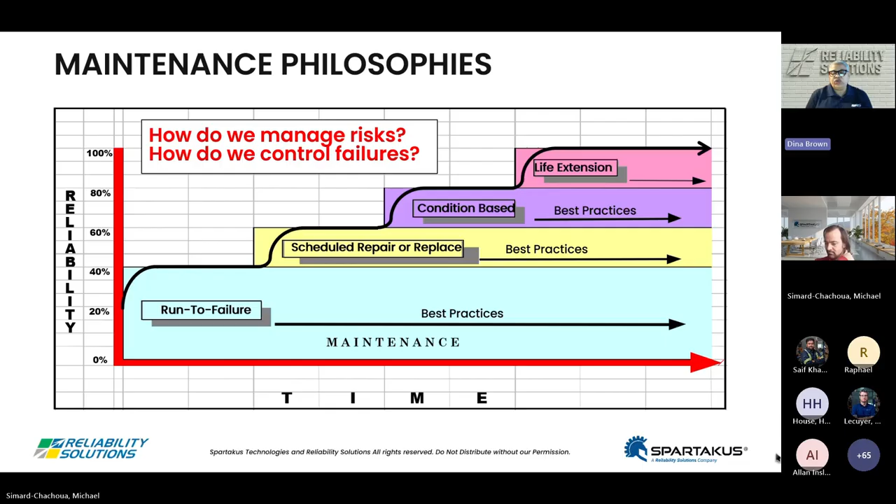So when we talk about maintenance practices, how do we manage our risk? Maintenance management is very much like risk management. How do we control those failures? We have to choose the proper maintenance practice on our equipment. Of course, you will see here: run to failure, schedule repair or replace, condition-based, life extension. We have to choose the right one for our equipment, because all of our equipment is different. It's based on criticality and other things about that equipment.

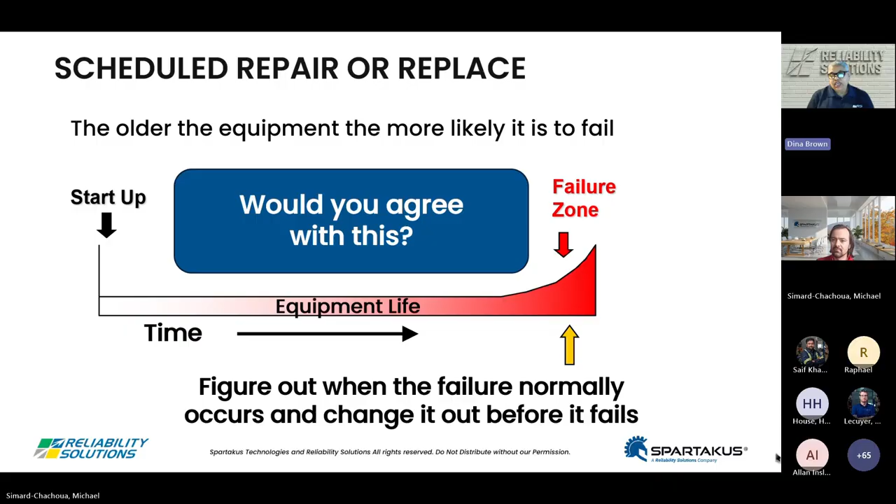So we'll look at the scheduled repair or replace for a moment. This is the B pattern from the Nowlan and Heap patterns, and everybody's pretty much familiar with that. It says the older the equipment is, the more likely it is to fail. How many people agree on that? If that's the case, couldn't we just figure out when the failure occurs and change it out before it fails? That would be ideal if this were true, wouldn't it?

But we have to keep in mind, when we look at this pattern, it only happens about 2% of the time in our equipment. Now, how equipment really fails - there's a total of 6 patterns that I'm sure most of you are very familiar with. I want you to look at that A, B, and C column there. They're all age-related type failures.

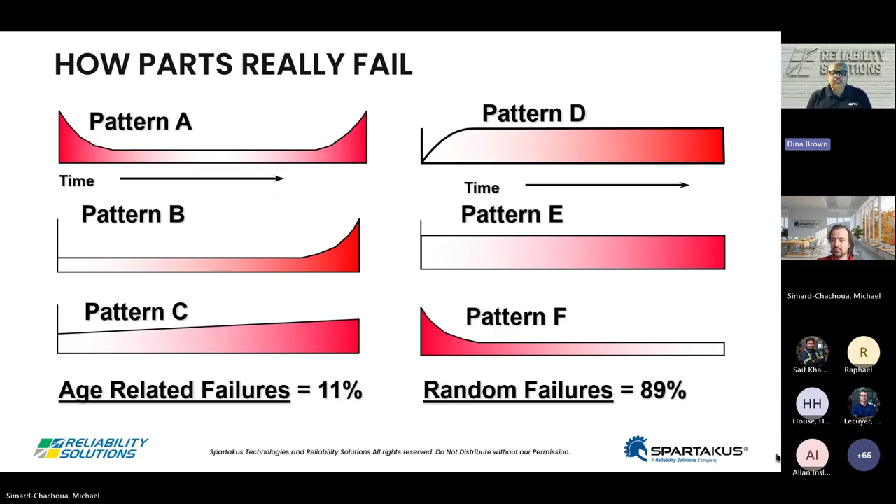And then when you look at D, E, and F next - wear-related, age-related failures on the first column, A, B, and C, and random failures over on D, E, and F. When we take a look at those random failures there, it says 89% versus failures that are based on wear and so forth, age-related, it's only 11%. So where's the bang for our buck? It's needling in on those random failures, and precision maintenance helps you do that.

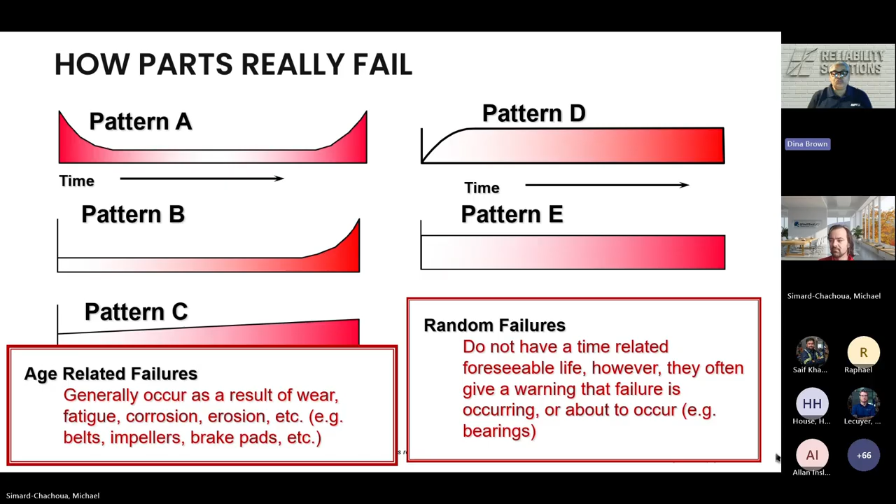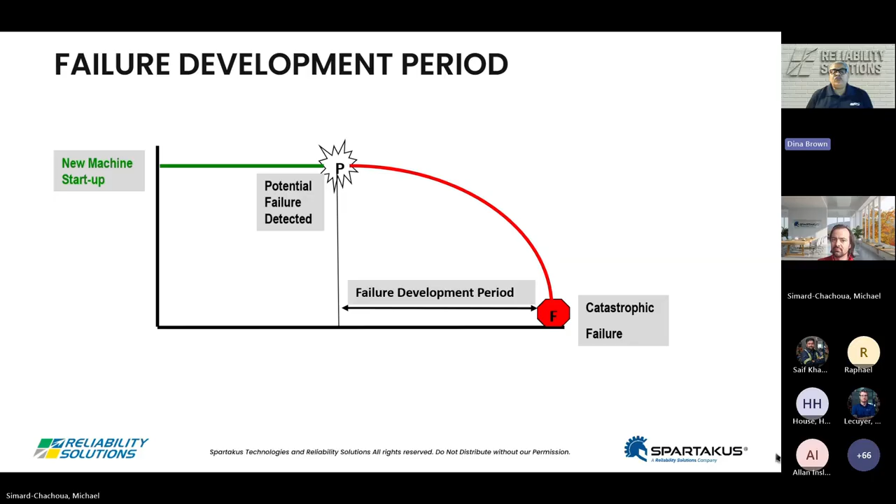And of course, coming from the Nowlan and Heap study, the failure development period, or P to F curve, was developed. That's just from when the potential failure is detected over to where we have a catastrophic failure. Keep in mind that before the catastrophic failure, we can have what? A machine that's functionally failed for us. It's not doing what it's supposed to do, although it's still running. So keep that in mind.

And within that FDP period, there's different tools we can use to detect things. Of course, you have your early detection, like your ultrasonics and vibration analysis, even oil analysis. But many times we can put simple tools in the hands of our technicians, mechanics, millwrights, or whatever, and they can find issues out there as well, especially if you don't have a vibration analysis program or whatever is going on in your facilities.

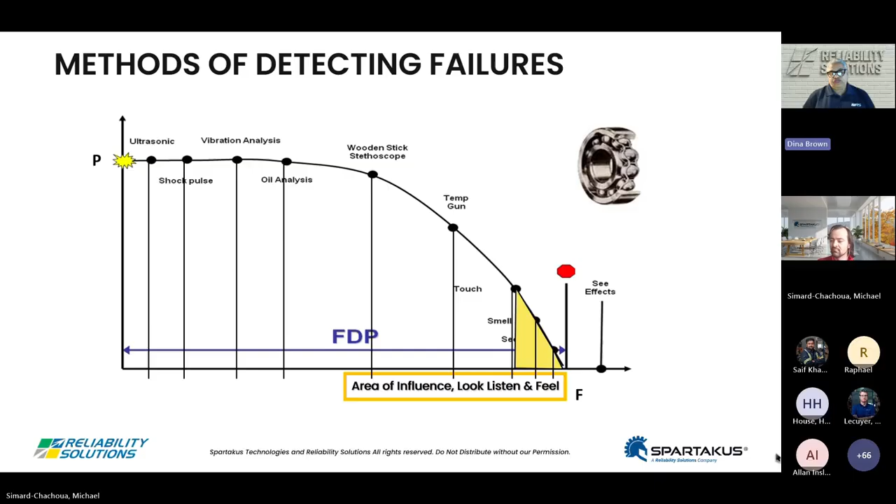This is the area of influence from us, from look, listening, and feel using the human senses. But by that time, it's pretty much gotten very, very close to catastrophic failure. So temp guns, strobe lights, stethoscopes, whether it's a screwdriver or a wooden stick - little things like that help as well.

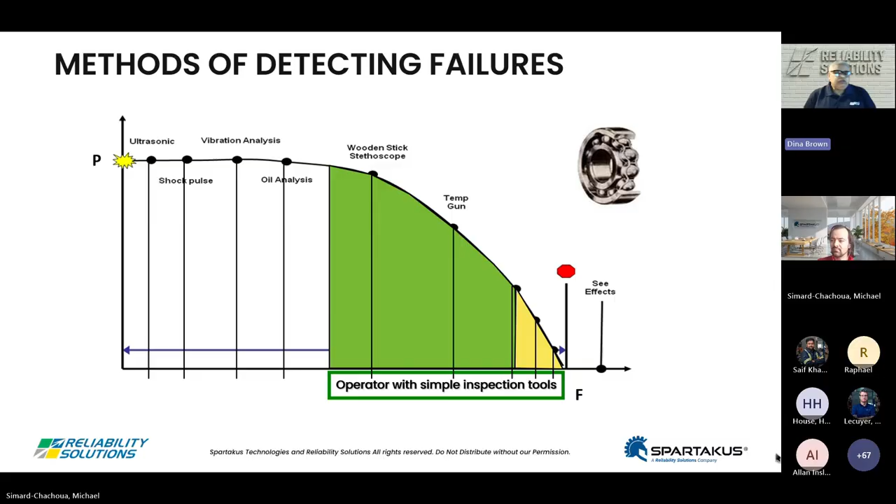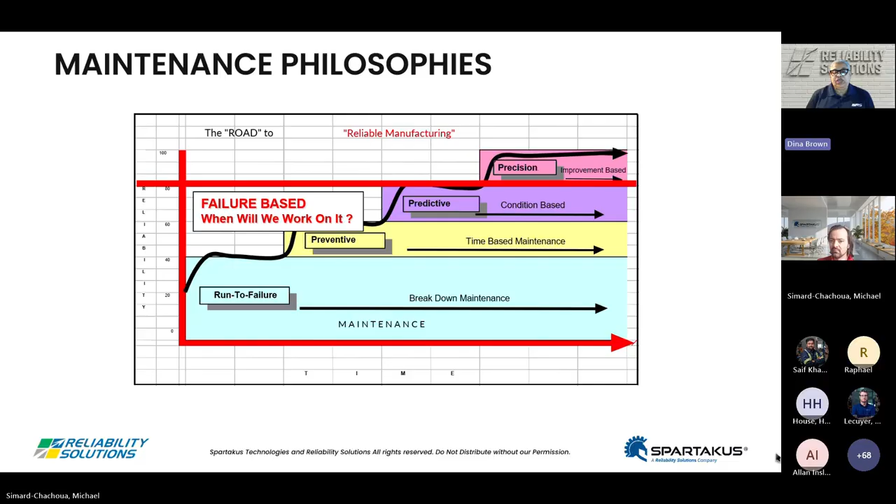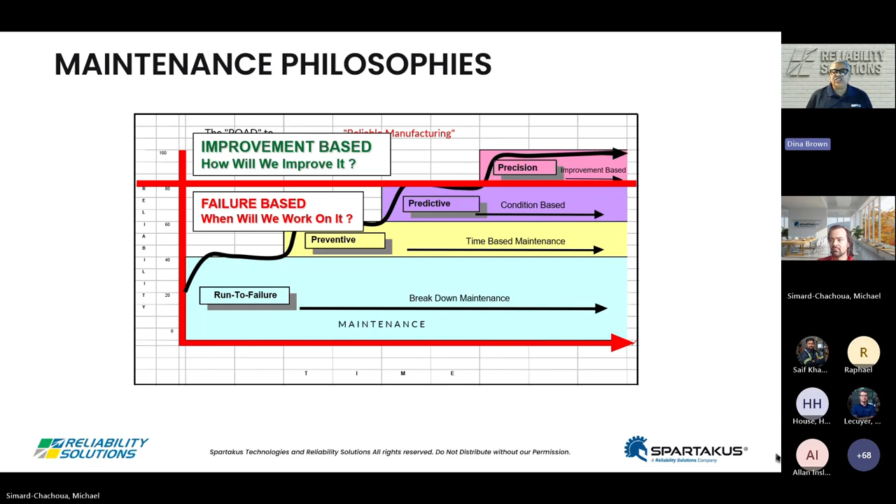Of course, maintenance philosophy, we just looked at this earlier. The big deal here is looking at run to failure, preventive, predictive, and precision, and why we should always be choosing precision. All of these practices have a place in our world, but if you look at the bottom 3, although they're very good with their intent and used where they should be, they're all failure-based versus the top one, precision, that is improvement-based. So no matter what practice we choose, we should always be doing precision, doing it right, even with run to failure, so it will last as long as it possibly can.

Next, and of course we talked a little bit about vibration. Why vibration? Vibration is the leading tool to tell us the health and condition of our equipment to start with. And we know if it vibrates less, it's usually running smoother, it's going to last longer, and it costs less to maintain. That's a win-win.

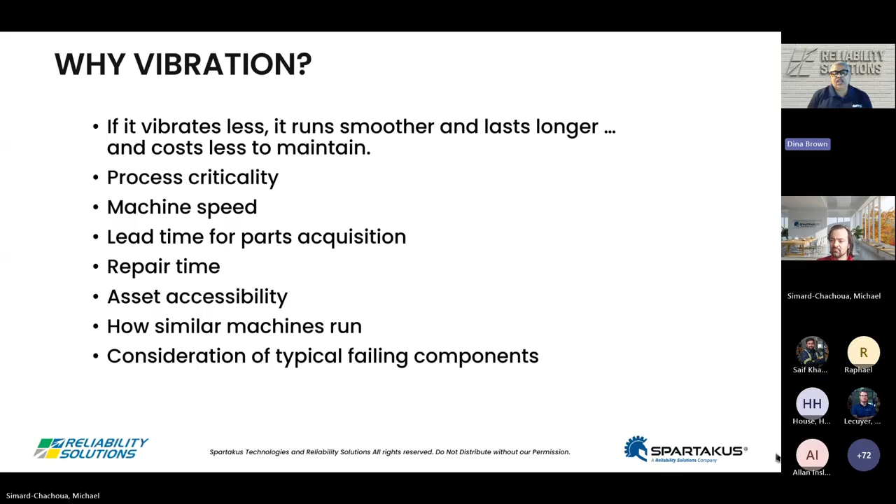When we talk good or bad, there are some simple tools we can put in the hands of the people on the floor, the technicians, the mechanics, the operators in some cases, so they can measure. And they want to measure usually three places, close to a bearing, all across that machine, so it can tell them what's going on with that machine.

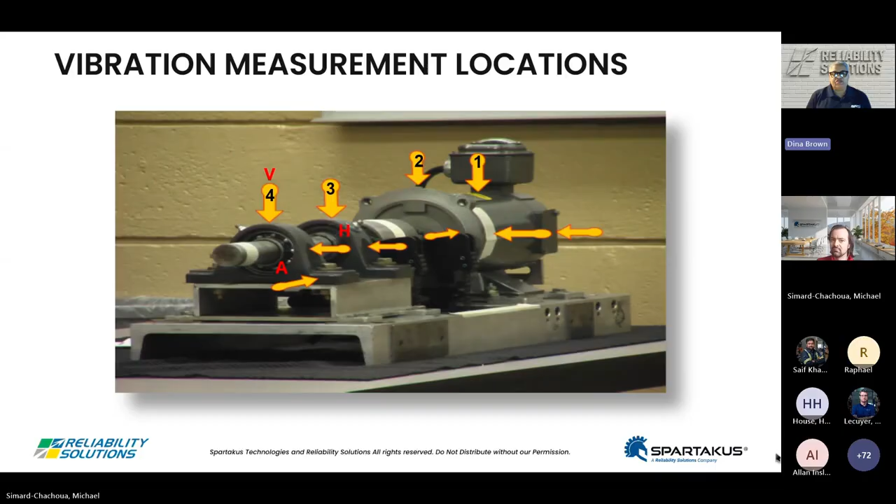And of course, simple tools don't always tell us what the actual problem is the way our analyst could, but a simple meter or vibration pen with troubleshooting charts can tell you where you get highs and lows in certain places and what the issue may be. The big thing is it tells the person on the floor when something is good, when something is bad, or when that machine just needs attention somehow.

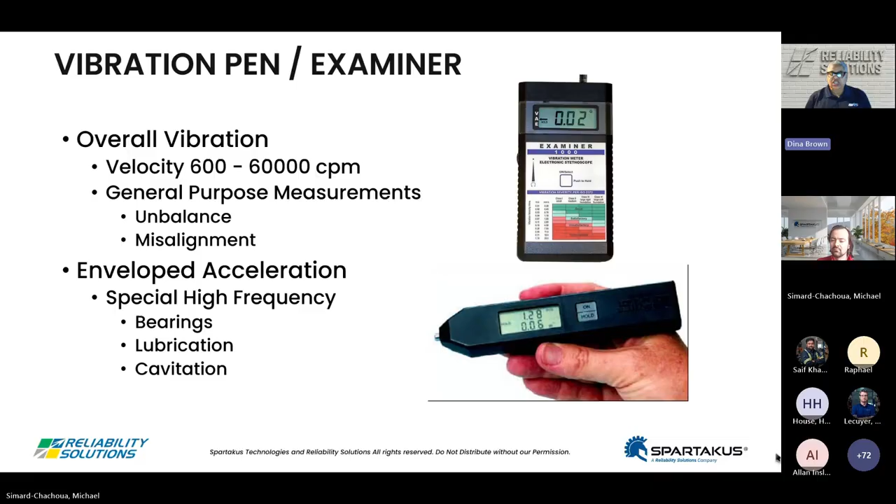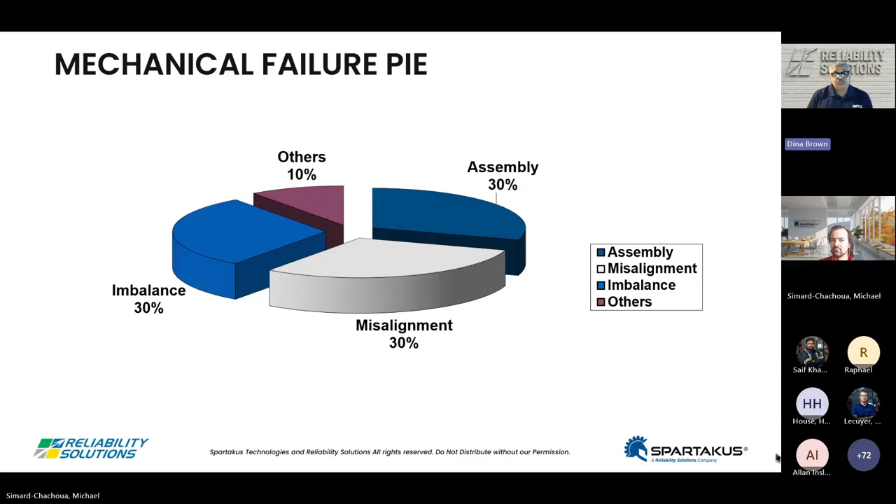And within the assembly errors, are we always torquing? And when we do, do we torque properly? Do we use the right sequence, the bolt pattern, and so forth? Pipe and/or conduit strain—do we check for those things?

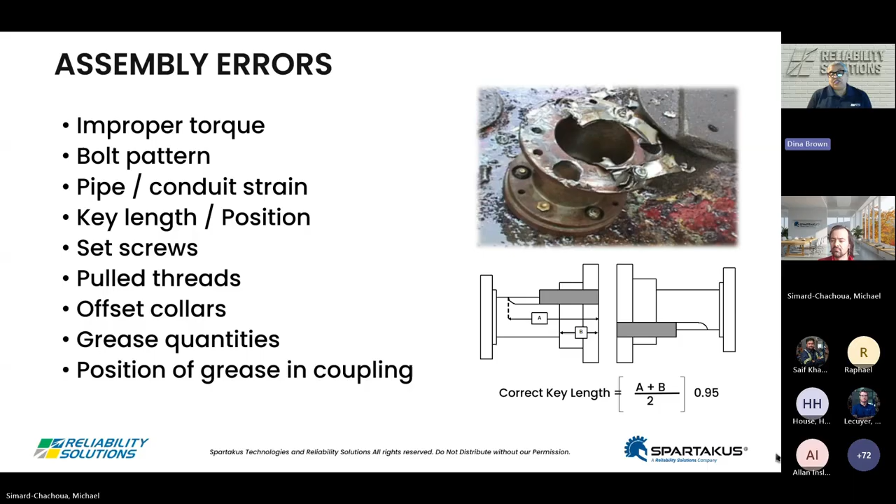Misalignment—that's what everybody wants to jump on, but if we don't take care of the assembly errors beforehand, you're still going to have a problem machine. Everybody wants to pull out a laser or whatever and do an alignment, right? And it does great things for our equipment.

But we have to take care of things like short leg, soft foot, angular soft foot. We have to torque the bolts so the machine will pull down consistently; otherwise it's going to give us different readings all the time. And of course, aligning our equipment restores the bearing clearance that we lose when it's misaligned.

We have to take thermal growth into consideration—machines change when they're up and running at normal operating temperature. Other machines in the area might affect them; machines can get into frequency with each other and cause resonance and so forth. Always ask yourself, are the published tolerances good enough? And we have to consider case deflection, twist from pipe strain or soft foot or whatever in your machines, which is going to cost you life on those pieces of equipment.

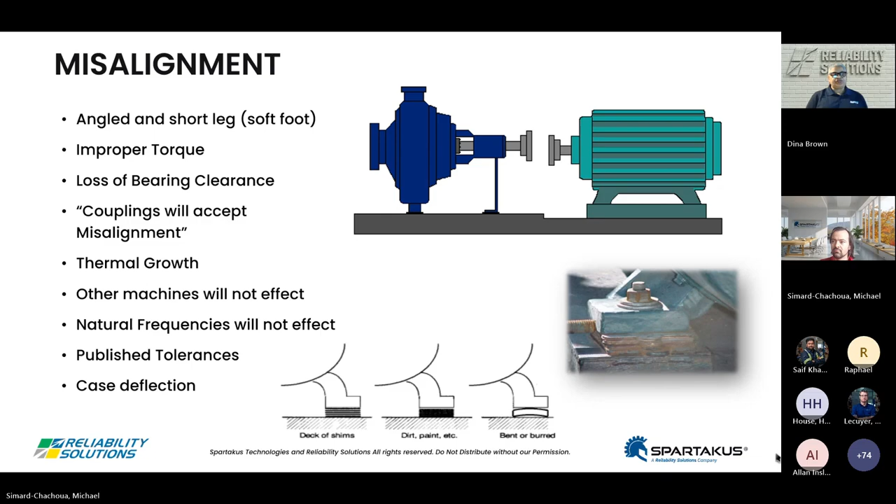Unbalance—another one of those 30%. We tend to suffer from what we like to call shiny metal syndrome. We get a part in and it's all shiny and new, looks round, looks perfect, looks like it's bored true on center. How do we know? Do we check for things?

If you think about an impeller, most of our impellers have casting porosity—are there any voids? Is there a denser area? Run out—do we always check run out on shafts and other components to make sure they're round, that they're true, that we don't have any high spots? What are your machining tolerances? Are we always meeting those specs? Because that can change things across the machine.

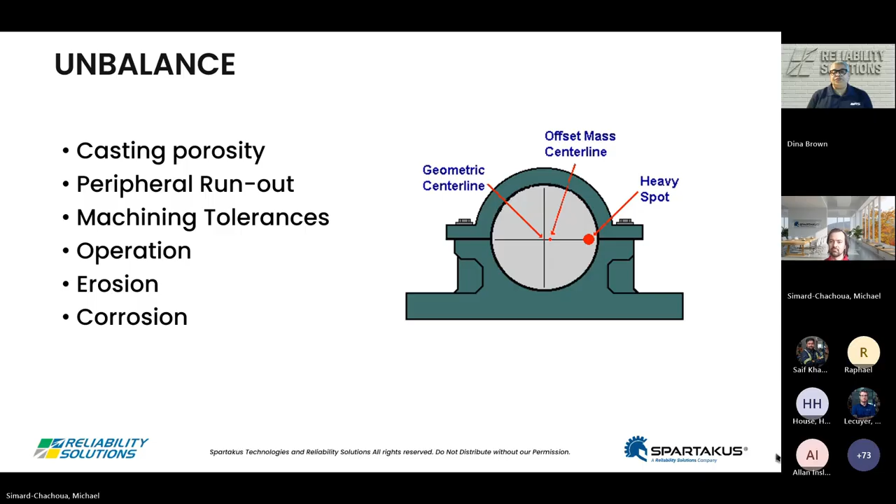There's other failures, resonance, like I spoke of. And of course, you can have bearing problems, whether it's a rolling element bearing or a plain journal bearing around motors and things like that. You can have problems with your rotor bars or air gap, gear mesh noise causing early failure in your gearboxes and so forth, pump pulsations in your pumps, and of course, system overloading.

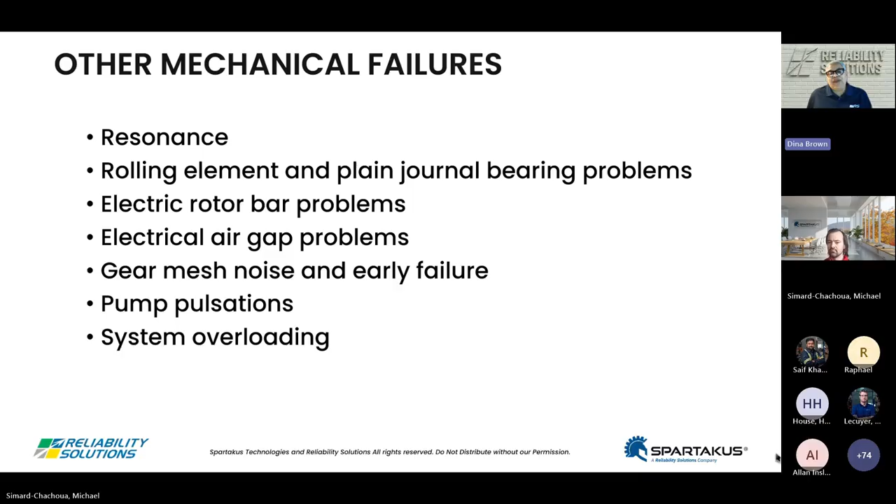Keep in mind, system overloading isn't always from the product that's going through that system. It can be some loads that we have left on that machine by not doing the right things on that equipment.

And of course, documentation. We cannot stress documentation enough. We need to be able to track and trace and know the history on that equipment. It would be nice to be able to go back into the system and see who worked on it last, what kind of problems they had, and any special notes they might want to hand on to someone else. But it also helps us make a lot of determinations about that equipment. So there's software available for that. And if you have to write it on paper and transfer it or whatever, we need that information.

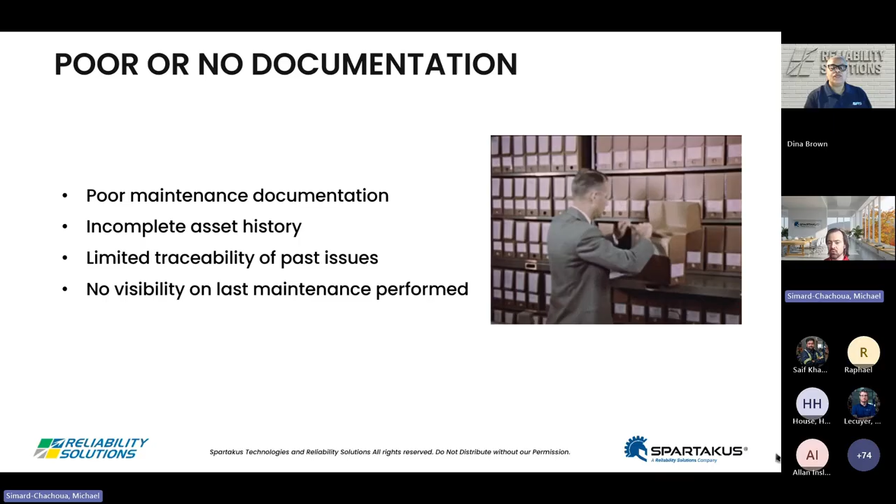Out of curiosity to the people on the call, can you guys raise your hand if poor or lack of documentation you would say is a common problem at your plant?

Yeah. Yep, that's usually the case. That's most of the people here on the call. So that gives you an idea.

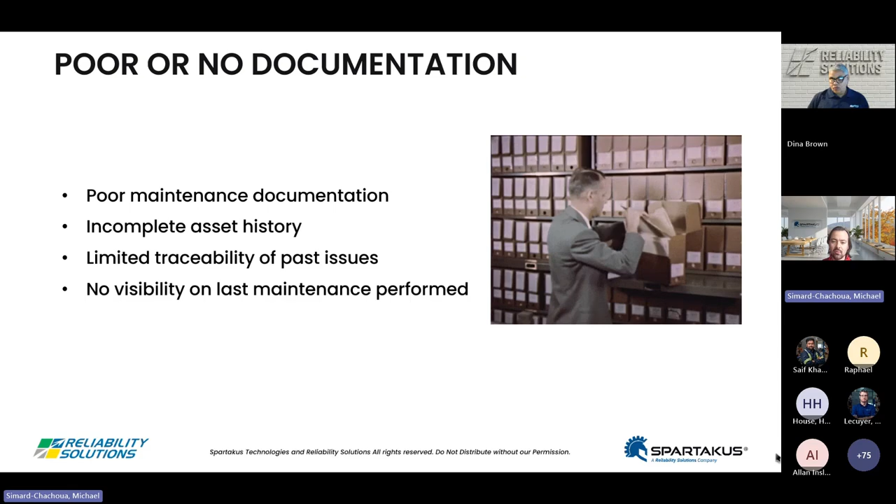These aren't made up. We're not inventing these. We lack documentation. We have poor documentation. I see it all the time when I go to various plants, and that's even the documentation to do the work, or documentation on the machine. But after that, on the maintenance plan, we also have those things. So those are also things that are part of precision maintenance that we need to absolutely get a grasp of and better control of. Thank you, everyone.

And of course, precision measuring tools and fits and tolerances, so important around our equipment. So we need to have the tools in the technicians' or the mechanics' hands and so forth when we're talking about working on equipment, so they can check things. They can make sure that that shaft is correct for that bearing, or that housing is not out of round or whatever, because all of those things can cost us life.

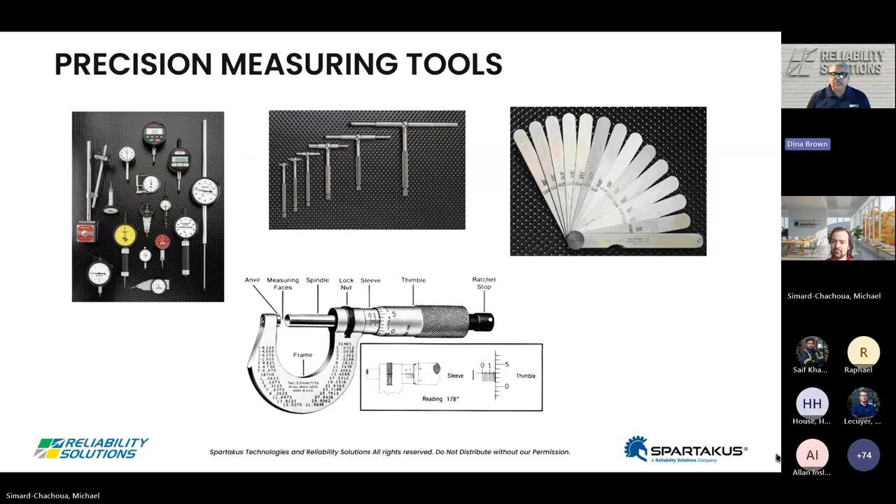They need that micrometer. They need those dial indicators to check run out and so forth. They need those inside mics or snap gauges to check for roundness and so forth on bores and openings and all. So we need all of those tools, and this is just a start there.

So what happens when we have improper fits, and how does it manifest themselves? How about system rubbing? I mean, most of us have put together a rotating piece of assembly, and then we turn it and we feel a little rub. Did we set everything right? Did we check all our tolerances and clearances and so forth?

That's huge. Or mechanical looseness. When it doesn't fit the way it should, then your analyst is going to pick up on looseness in that machine right away, and we're going to have a premature failure. Fretting and fatigue. When something doesn't fit quite right, you get minute movement between those two surfaces, like between the surface of the shaft and the inner ring of a bearing, and it frets.

The bent and worn components, of course, speaks for itself. Then you have Brinelling. You have true Brinelling and false Brinelling. True Brinelling from impact damage, and false Brinelling from oscillation or vibratory action acting on a machine when it's down. And we see that a lot in bearings because people aren't rotating spares and so forth.

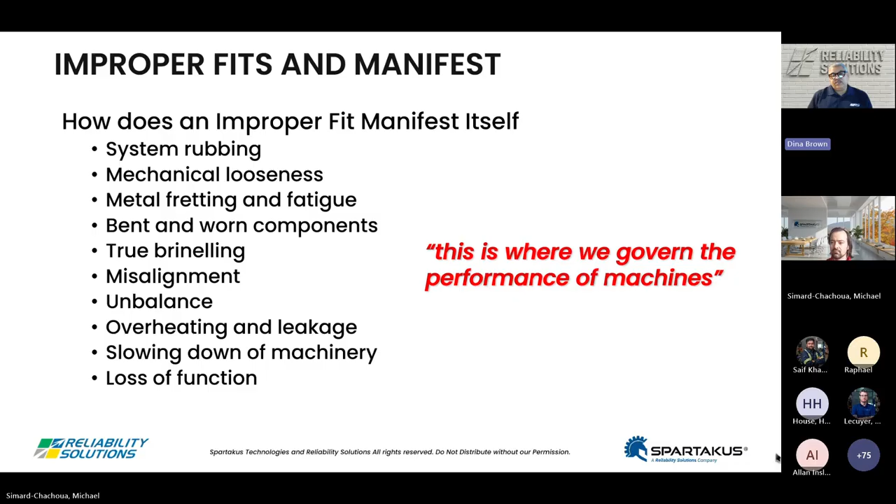Of course, misalignment and unbalance speak for themselves. And of course, overheating, leakage, slowing down the machinery. And of course, we end up losing the function of that equipment. Those last three apply across the board, but especially around hydraulic systems. But keep in mind those fits and so forth, the way we put things together really governs the performance of that piece of equipment, not to mention the life of that equipment.

And of course, this is just a standard ISO fit chart where you'll have those letters and so forth and know what they mean, know what type of fit you need. If you have an uppercase or capitalized letter, you know it's referring to the housing. And if you have a lowercase letter, it's referring to a shaft. And usually there's a number that follows it, not shown here.

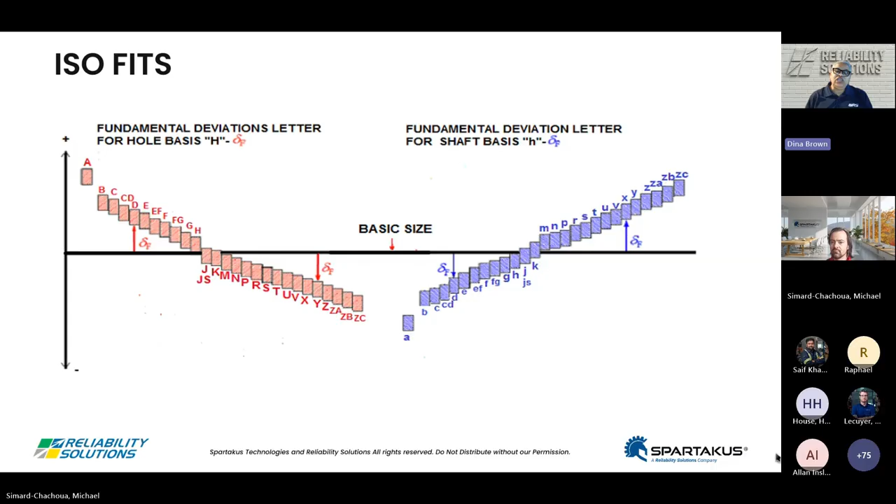But when you look at the charts, you make sure that you look at the right column for the type of fit you need for your equipment. Make sure it's within that shaft, is within that range of whatever it has to go into. And of course, soft foot.

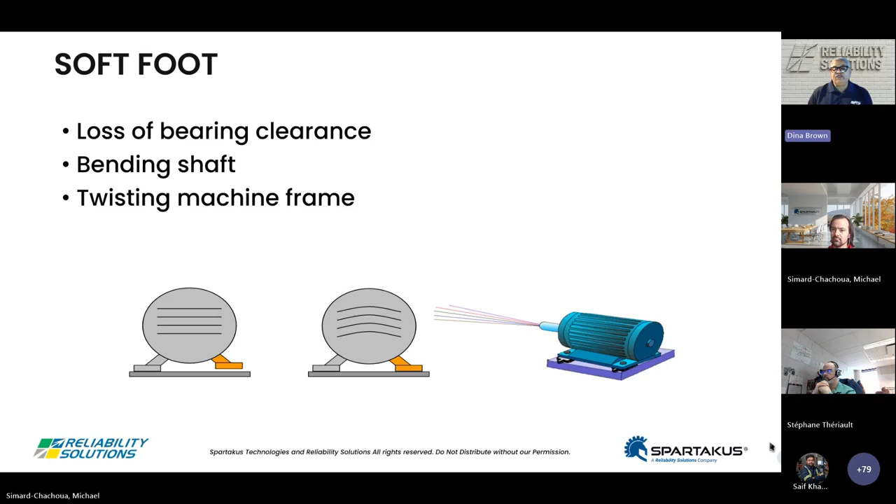And that affects all the internal components. And that third picture over to your right, when you take a look at that shaft center line, it's all about shaft and center line and holding that position, right? Every time you tighten and loosen that machine, or that foot that has that soft foot, it changes that position. So it gives you inconsistent readings on the laser. It never stays where you want it. It's put in 10, take out 9, move to the right, move to the left.

The deflection out on the end of that shaft, saying like 16 thou due to a soft foot, your laser doesn't know that. Or your dials don't even know that. Some things we have to do physically. So we need to check those things because it's going to try to align it out there. It's not misalignment. It is due to a soft foot.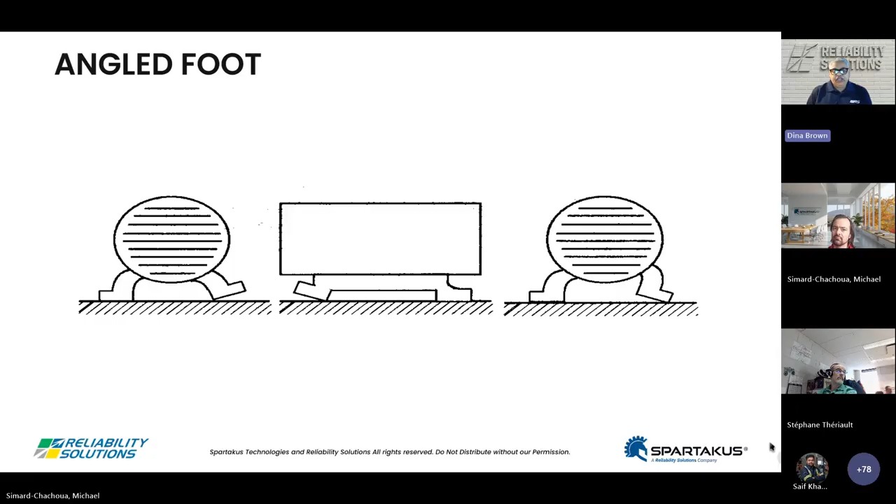Just a sampling of some of the documentation we would use because you want to go all the way around and check everything, and start with the worst foot first, and double check the others before you try to jam something under there, because fixing one foot can affect another foot. So do keep that in mind.

So I've got another one for the people, if you can raise your hands. How many of you guys actually do in-house the soft foot, short leg, proper and angular foot inspection on a regular basis, like it's part of your installation plan? You guys do that? Yeah? Few? Yes. Some. So I see it's about, okay, maybe like 60%. So it's good. It's good. So that it's being done. And that's for the 60% of you that do do it. And for the others, well, it's an opportunity to catch up.

And yeah, I see you talked about laser alignment. They are related, I suppose, but they are essentially two different problems to handle with their own respective solutions.

Thank you, everyone. You can bring your hand back down, unless you have a question. Oh, I see a couple of people bringing down their hand. I'll check. Dina Brown, you have a question?

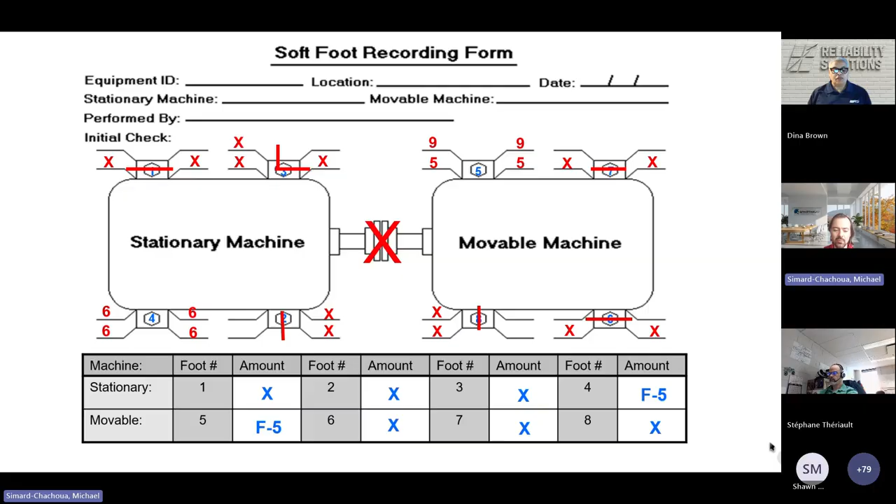Great. Well, good for you to at least have that part of your plan and your program. And doing it properly would be then the next step to ensure that it's done properly and systematically is definitely something you'd want to look at from your perspective. Okay, thank you. I'll continue.

Fasteners and torquing, very important to our equipment. The way we tighten and torque things down can make all the difference, whether something will leak or whether it will stay in that position, whether that bolt is tight enough, whether we get twist or distortion in our systems. It can make a difference.

Of course, talk about loose, you check by hand. Keep in mind it could still be loose and you can't move it with your hand. It may not be where it needs to be. Stud length can cost you because if it's too long and you're threading into something, it will bottom out and you think you got it, but you don't have it. Too short, if you're going through a nut on the other side, of course, you should have a couple of those threads on the outside so you get the full strength of that fastener.

And of course, over tightening and leaving things too loose is a problem. Over tightening, of course, can cause you to have cupped washers, especially if you're not using the correct hardened type washers and so forth, and pulled threads depending on what you're threading into. So we should be very, very familiar with bolt grades and the materials we're threading into and so forth. And of course, corrosion, as you can see in those pictures, that affects our torque on our bolts as well.

And of course, looseness, you'll get fatigue in the bolt. It will break for no reason over time, over cycles of movement in it because it's loose and we don't even realize it.

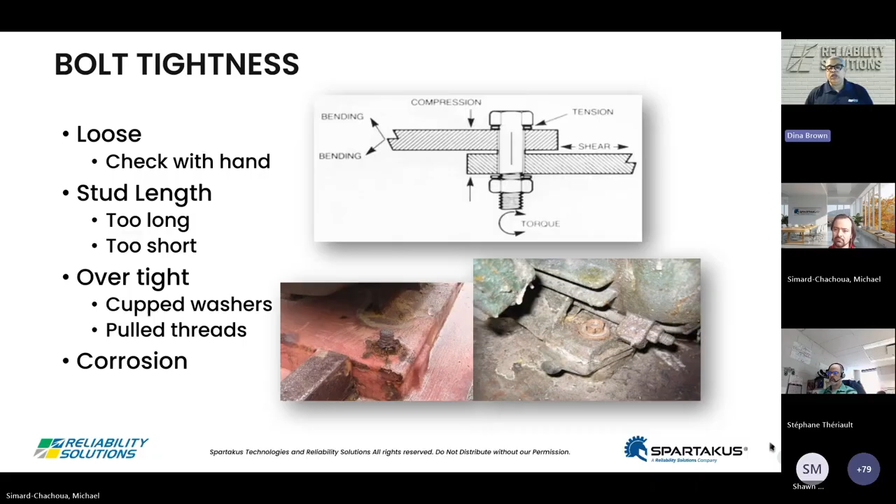Mechanical properties of a bolt. We need to understand tensile strength and proof load and the yield point of a bolt, the importance of torquing correctly and adjusting that torque if we're using some type of extension or some type of lubricant. But we want to stay in the proof load area, the elastic range.

You do not want to get into the plastic range. Once you're in the plastic range, it is permanently deformed. It will still pull and hold a little bit, but when you get to the end of that plastic range, not only is that deformed and won't ever come back, but then it's going to start to pull apart. And most people have felt that. If you've been out in the field long enough, you have felt that bolt start to pull apart, especially smaller bolts.

It's really important to look at this slide and understand, in this example we have a bolt, but this really applies to all metallic systems. They all suffer from this, and they're often not properly considered so that they be used only in their elastic range, unless specifically designed to be used otherwise.

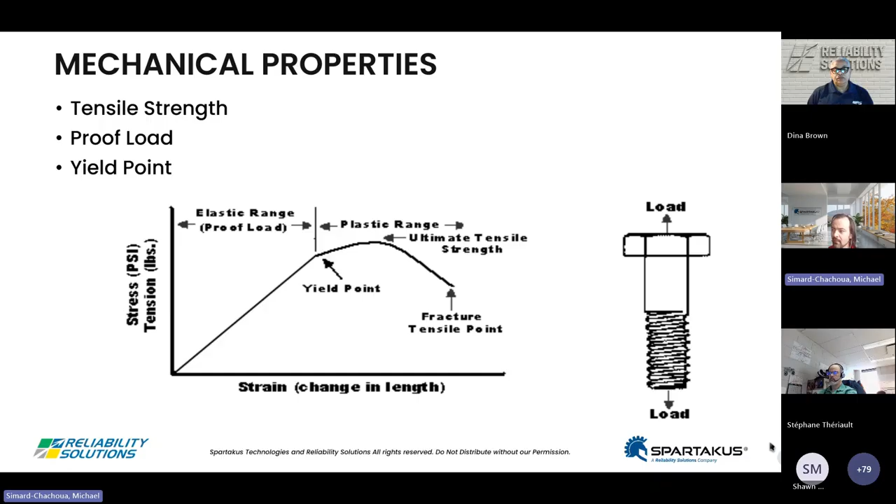Rough to precision. When we talk about alignment, of course we're going to rough in, right? We rough in just to get our indicators so they won't be so crazy when we do a rotation, or get our lasers within range. So rough to precision. And of course, understanding alignment.

Keep in mind, when we talk about alignment, it's all about that center line position. And when we rough in, we're only doing what? Putting a straight edge across a coupling or a shaft or whatever. That's not always true and close enough, and of course that's eyeballing. That's still eyeballing because you're eyeballing the straight edge. So keep that in mind. We want some type of tool to get us center line to center line position all the way across the machine.

Of course, we have two types of misalignment. You have parallel offset, which is higher or lower, or one way to the side or the other if you're talking about horizontal. And then we have angular.

And of course, with angular, if you are still roughing in, you could use a rise over run and do some calculations. And it's pretty simple. You can measure the gap from one side to the other, or the top or the bottom of a coupling, and get that gap difference and divide it by whatever your sweep is, which would be your coupling diameter. Measure from the center of that coupling to a foot, and it will tell you what to put there or take out of there if you're talking about vertical, or how much to move side to side if you're talking about horizontal. So it's a simple formula there.

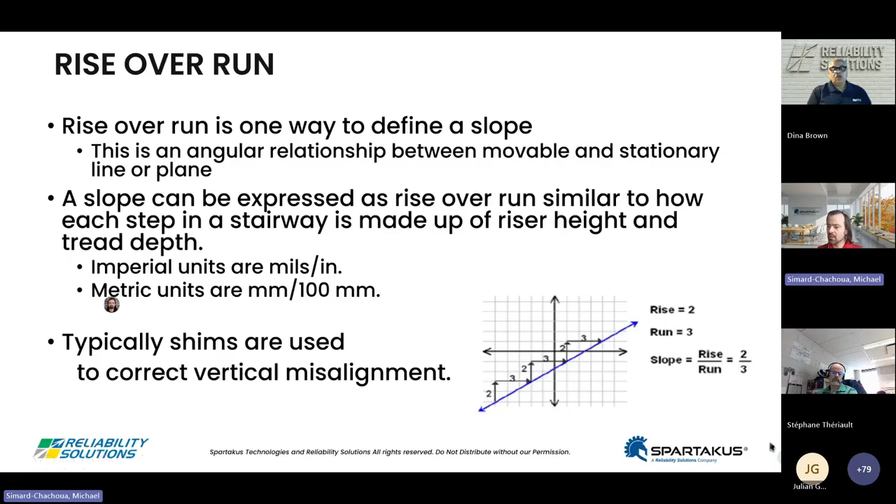Okay, somebody else is asking what should they expect for angular alignment tolerances? Angular. Same thing - it still applies, because when we talk about that 2 thou or that 1 thou at every measured point across, keep in mind we want to be on the same side of the line. If you cross that center line position, that's angularity. And of course, angularity is much more stressful on our machine in most cases than parallel.

Okay, thank you for your question, Ebenezer. We have to keep in mind that angularity is expressed over distance. So a little bit over here at the coupling is a lot out here at the end of that motor or that pump or whatever, 30, 40 inches out on a gearbox or something. That's huge.

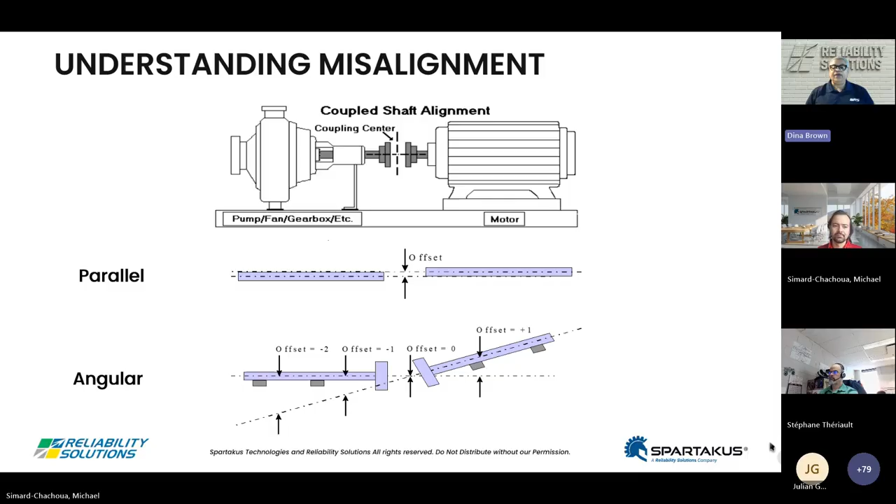Okay, let's keep going. Thermal growth, one of my favorites. Yeah, we have to take that into consideration. You heard me say a little while ago, we wanted that within tolerance at its normal operating state. Keep in mind that a lot of machines change when they heat up.

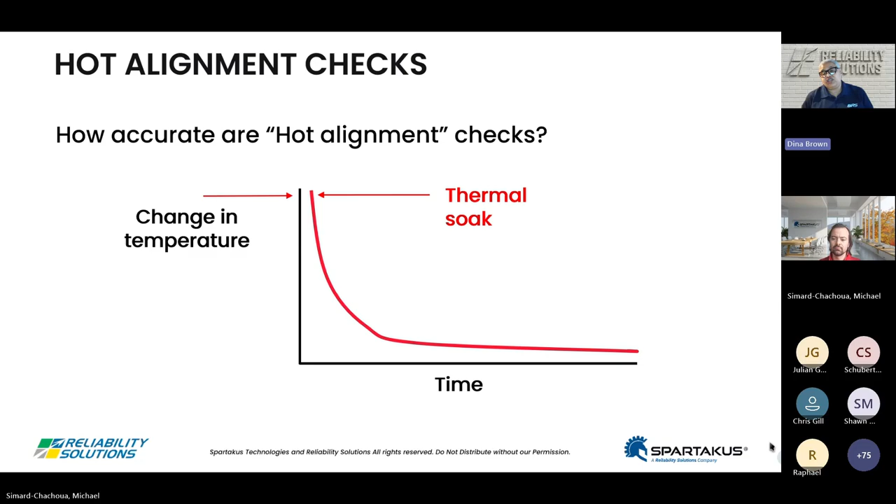So we may have to go out and do some calculations. These calculations need to be done well ahead of time, though. A lot of people like to do a hot alignment check or go by some parameters given to them from a vendor, and they don't know their operating parameters and so forth. So we really need to go out and do some checks. Of course, you've got to consider things like thermal soak if you're trying to do a hot alignment, where that machine soaks it in, but then that heat curve changes really, really quickly. So in today's environment, by the time you get it locked out, it's already changed.

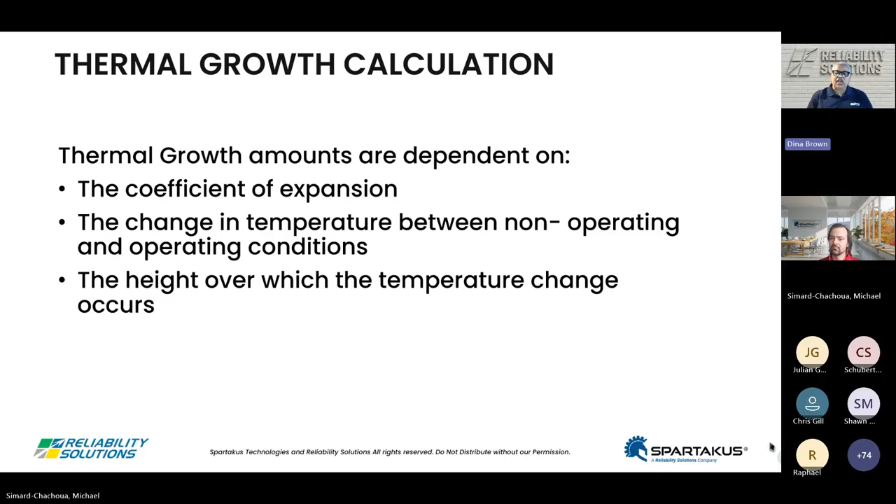So how can you get a good accurate measurement? And we know that thermal growth is based on what? The coefficient of expansion of that material, and the change in temperature between non-operating and operating. So you're going to get, usually a minimum of 4 readings. If it's a bigger machine, you're going to get more in the plane of the foot, from the bottom plane of the foot to the center line of the shaft, because that's the area we can control. You're going to get it while it's normally operating, and you're going to get it when it's down, and sometimes it goes back to ambient, sometimes it doesn't. And we'll work all that out, and that will tell us how much that particular foot is going to grow.

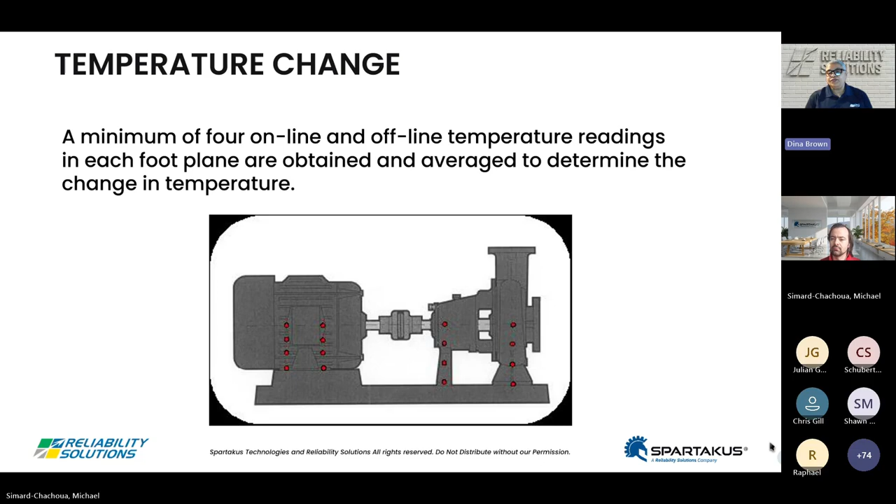And there's software and there are charts and so forth that you can use for that as well, to just work it out. So it's not as complicated as it sounds, because it's just step by step if you follow those steps. This is just showing you the minimum of 4, no matter how small that machine is. You'll notice where the readings are taken, the little red dots in the plane of the feet. We get that average temperature change, and multiply it out by the coefficient of expansion and the height over which it's taken.

Oh, we didn't talk about pipe strain, but we know pipe strain affects our machines, and this is probably not a pipe strain problem. But here, if you look at this gearbox, you want to make sure that the hot temperature you're actually getting, especially if you're going out getting readings for thermal growth or something, are the actual readings for that machine. And that's why I stress under normal conditions. If you take a look, this is a gearbox. If somebody had gone out there who did not know that this thing wasn't supposed to run at like 260, if you look over to the side, they would have taken those readings and gone back and done some calculations, and they would have been way off.

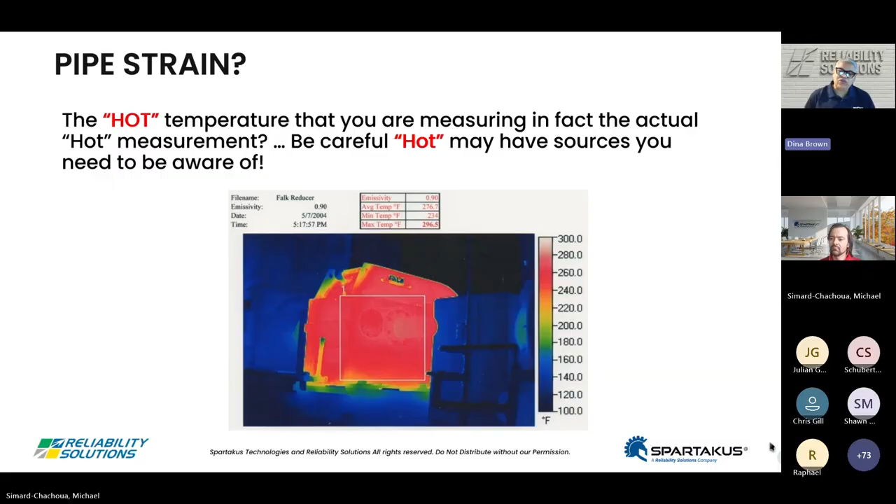But that person noticed and questioned it, and they went and checked, and somebody had accidentally filled this thing with oil, almost full, and it got really, really hot. And of course, if you look at the next picture, when they got the right level in there, this is what it cooled off to. It's pretty normal for a gearbox to run around 140 or a little more, right? But that would be the normal running temperature. You can see how far off that could throw the calculations. So we have to be very, very aware. And like it says there, approach with an open mind.

One of the things about thermal growth and pipe strain, I find when I go to various plant sites, it's one of the least executed calculations, and I would say it's quite rare that I go on site and find that they know how to do it and do it systematically. I'm curious if my experience matches what you, the people on the call, see. So would you say that you, or some of the people at your plant, are quite proficient in this domain and think you have it covered? Could you raise your hand?

Not a lot, eh? 1, okay. 2, 3. So as you can see, great for you guys that you have that expertise. But as you can see, that's a much lower percentage of the people on the call. I don't know, this is like 5 or 10%, not even, of the people on the call.

We tend to find that one of the domains where people have tackled a lot lately is misalignment, so a lot of plants work on that and adapt that. But when it comes to certain other pillars of precision maintenance, and I don't necessarily know why, but for instance thermal growth, it tends to really get missed. That's the best word I can say. It tends to just not get done and be one of the leading hidden causes of issues.

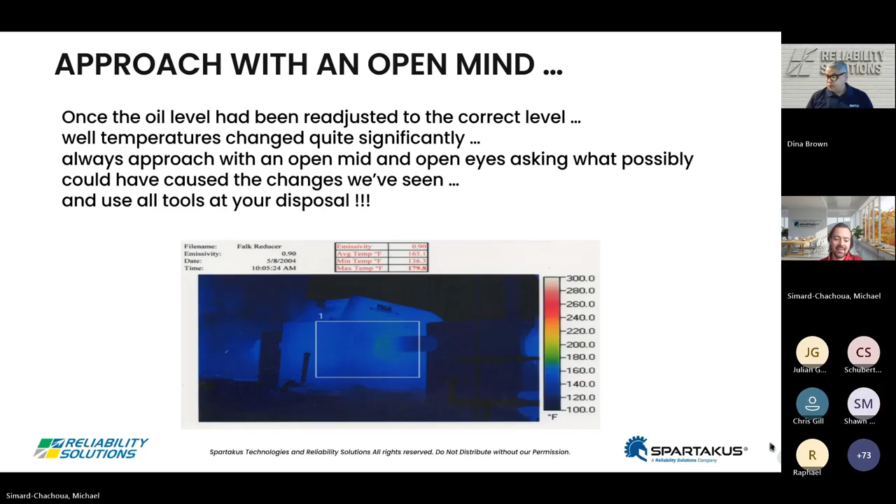Balance and balance retention. Let's talk about it a little. Of course, we know that we want our machines to run true to the centerline position. When we have a heavy spot on something, whether it's a shaft, impeller, fan, or whatever, it throws that center off of the center of geometry. And of course, those vector forces spread forces across your entire machine. Unbalance is simply a mass times a radius. So we need to balance our equipment.

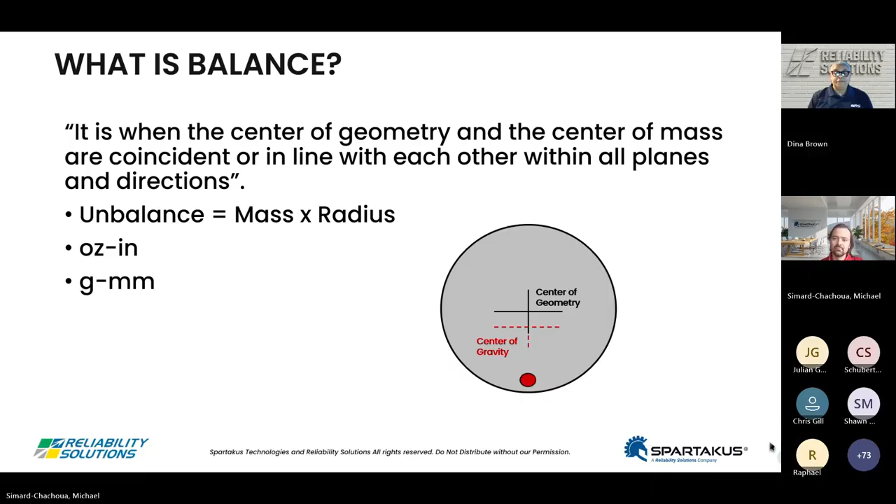And of course, there are different balance standards out there, and you have to decide what's right for your machine. Problem many times is most people, when they're ordering component parts and so forth, don't even specify. And of course, what is the role of a technician around balance? Of course, is to retain the balance quality that's there. But like I said, we need to specify so we know what we're getting, and a lot of times we need to be able to check.

And of course, when we talk about assembly errors, many times assembling component parts so that they do what? Improve the balance across that machine. You heard me mention keys, matching the weight that was removed when those key seats were cut out. You heard me mention set screws.

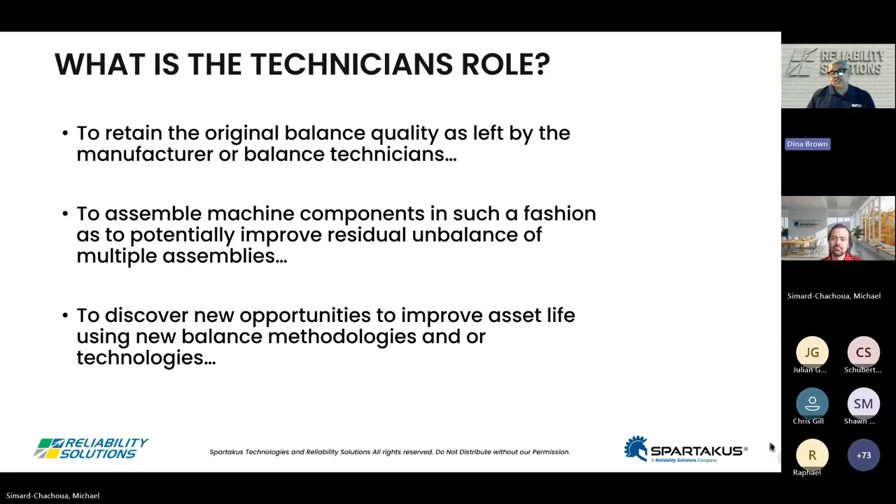Most people don't think anything about a set screw, just tighten it or torque it down anywhere. If you've got set screw collars like on pillow block bearings, one on one side, one on the other, and you don't set those set screws up correctly, then you're going to put the center line in a different plane and you may wobble across that system. So we want to set them up in the same plane with each other, so we run true from one collar to the next, because you've created a whole different new center inside that collar, since in most cases there's sliding clearance there. So it does move in there if you don't set them up right.

So what causes it? We talked about casting before, the mass distribution. Casting porosity is not always true, right? Machining errors - how do we know that was bored on center? How do we know? So if someone squared it up, trued it up in the lathe when they bored it out, it may not be right. We need to be able to check those things.

And like we mentioned, assembly of multiple component positioning, how we position things. We talked about the keys - most of the time, we want to turn those keys opposite each other to get rid of any residual unbalance of that rotation around couplings and so forth. And of course, the operation of equipment, like we mentioned - adhesion, erosion, corrosion, any repair, welding, your lubrication. Anything that changes the mass of that equipment can change the balance.

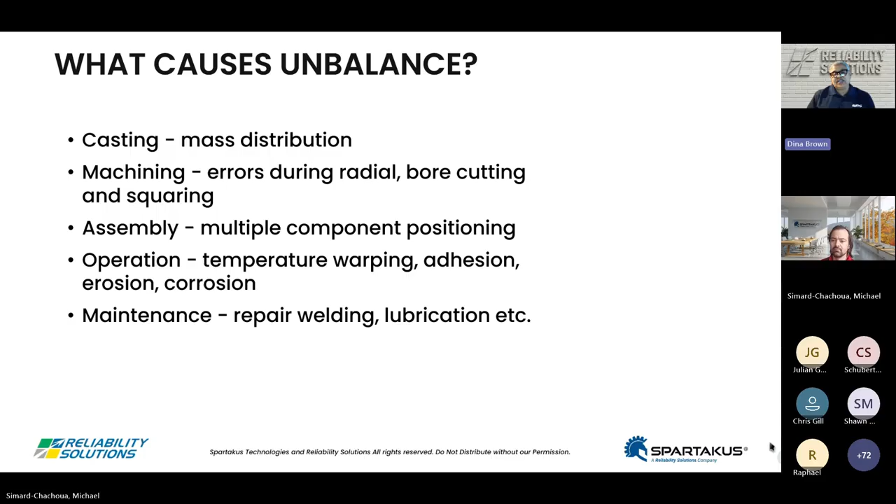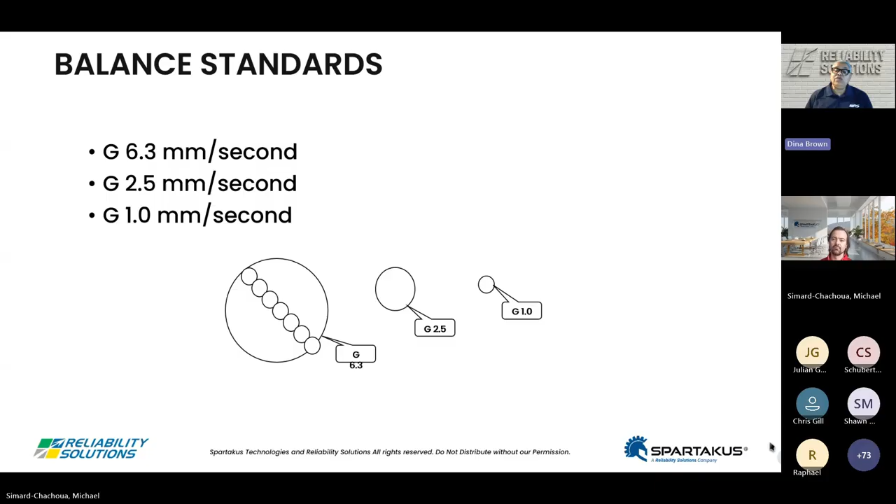And just a few balance specs there. Generally, most people try to go to a G1 on most equipment. There are some you can get away with a little more, G2.5 or G6.3. If you're not ordering at a specific spec, you're probably getting G6 or a little higher sometimes. So do keep that in mind. And of course, bearings, lubrication, and couplings.

Everything we've talked about pretty much will help extend the life of our bearings. Bearings are tough, and most of the time manufacturers say they should last somewhere between 11 and 22 years. I've seen bearings older than that. So we know we can get that life out of them, but many of the things we do, we cannot.

If you take a look at these failure categories, you have installation, lubrication, operating, and environment. All of those are contributing factors depending on how we handle things, from the shaft fit to the housing fit, how we handle the bearing ourselves. In the lubrication, did we do too much?

Did we do too little? Did we go to it too often? Did we choose the right viscosity of that fluid? In the operating category, usually when you think of operating, you think about the operations of the machine on the operator's side. But look at that—misalignment, unbalance, belt tension. All those things cost us life in our bearings.

And of course, the environment—things like contaminants, not having the right seals for that environment, vibration and so forth, electrical current passing through it and putting that pretty pattern in our bearings, that's going to kill it. And of course, false brinelling, like we mentioned earlier.

We should be rotating our spares out in the field that are not running at the time, rotating them in and out of service every week or every two weeks, depending on how much vibration is in that area. Or the spares sitting on the shelf, we should be rotating those. And I must say now that most people are doing that, but there's still some missing.

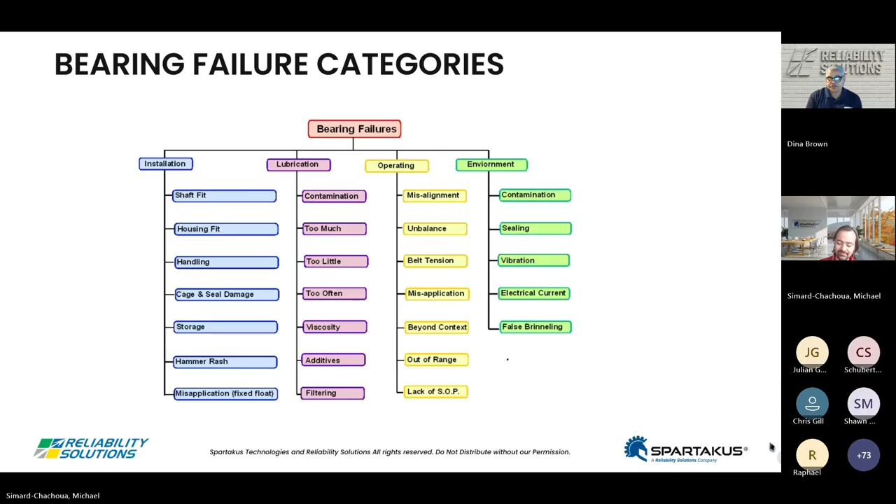Absolutely. And of course, that's a bearing failure categories chart here. You can see 36%—back when this study was done—was lubrication causing the failure. A lot of times that goes to contaminants and so forth, how clean our lubricant is, and all. Because keep in mind, we have very minute clearances in most of our bearings, so it doesn't take much to destroy that. And of course, 34% was installation and handling.

So if we do that right and lube it right, there you go—you've got a 70% chance right there. And then, of course, there's environmental and operational issues that contribute to failures as well.

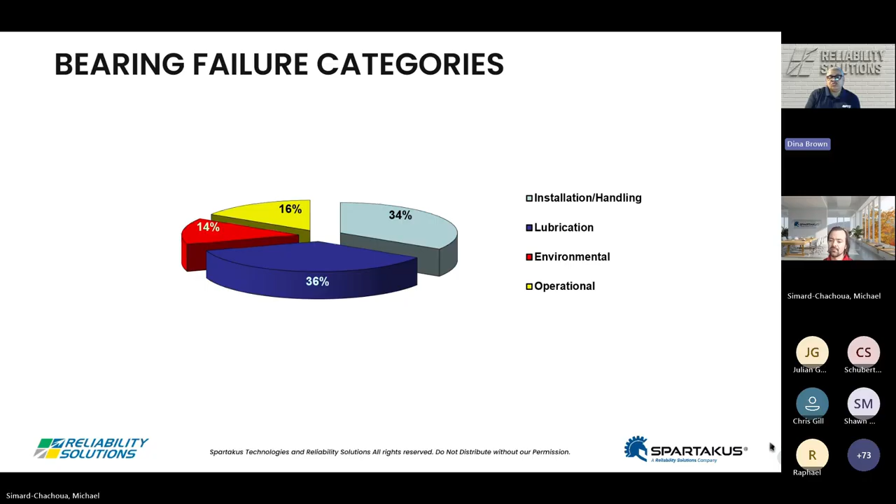Symptoms of a failing bearing: temperature. Keep in mind that a hot bearing does not always mean that bearing has failed. It could be hot because somebody put too much lubricant in it. Of course, if it's a bad fit or something, it's going to eventually fail. And it could be getting heat from external sources in some cases.

So how many of you guys regularly use ultrasound during your lubrication to ensure that you've put in the proper amount of grease? Okay, few. Decent few.

Personally, I've seen the transition in multiple plants—those that did not use it, and then those that do use it. It's one of those things I consider a quick win in terms of it being easy to learn, quick to learn, and the equipment is not particularly expensive within the usual prices for items in a plant.

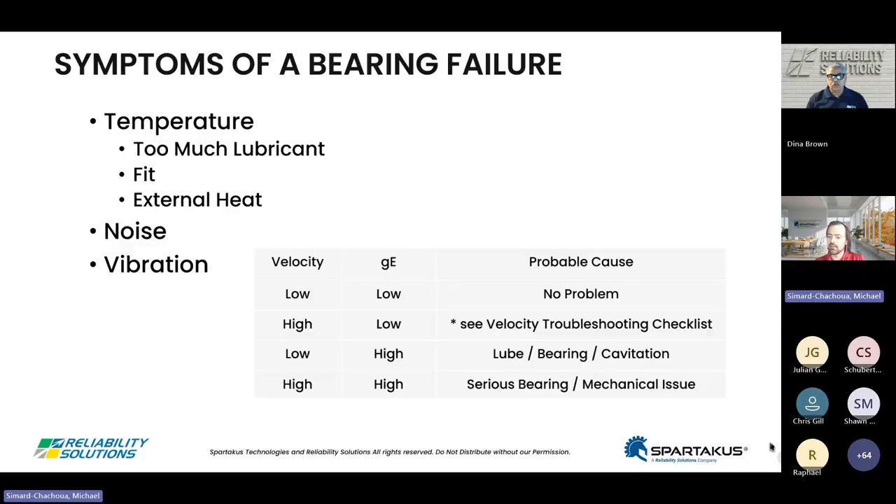Okay, when we're talking about lubricating, probably one of the most important characteristics, whether we're talking about oil or grease or whatever, is the viscosity. And this is just a simple chart showing you the effects of heat or temperature on viscosity.

They're doing a comparison with something like 10W30, and you can see what it is at 30 degrees—let's say it's a vehicle, 30 degrees when you start it up, and you're at about 400 or so kinematic viscosity centistokes. Then you get down the road a little ways and you're at 100 degrees—it's changed already to around 60 or so, if you look where it crosses that. And of course, at normal running temperature around 190 to 200, with a 10W30 you're down to about 14 or 15.

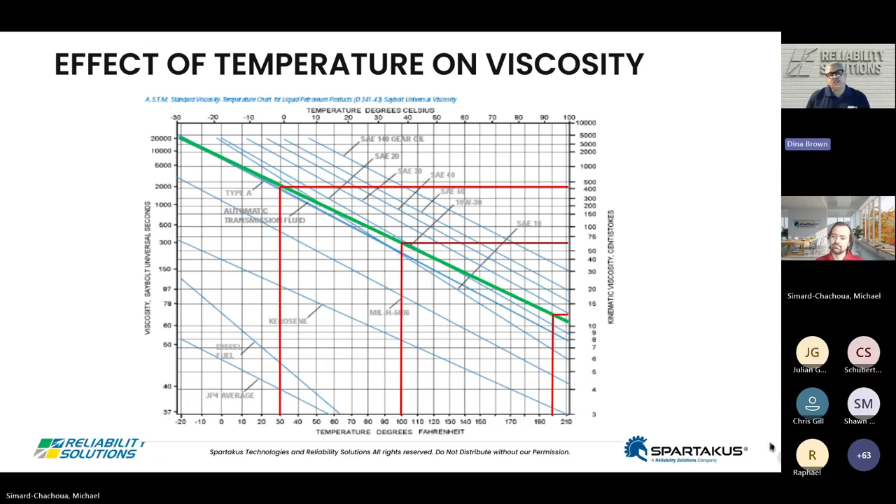So that's huge, because that viscosity is what keeps separation. I know I was talking about an automobile here, but when you think about your bearings and so forth, that viscosity keeps that separation, especially particularly when it goes through the load zone. So it's very important that we choose the right one.

And of course with grease, you have the NLGI numbers—it goes from like 000 all the way up to a 5, I think there's even a hybrid of a 6. So we're talking about something very fluid up to a block grease. But what I want to say here is most of your greases are at least 90% oil—what we're seeing is the thickener that pretty much holds that oil in place. Never confuse the thickness of the grease with the viscosity of the oil that's in it. You need to know what that viscosity of the oil is according to your system.

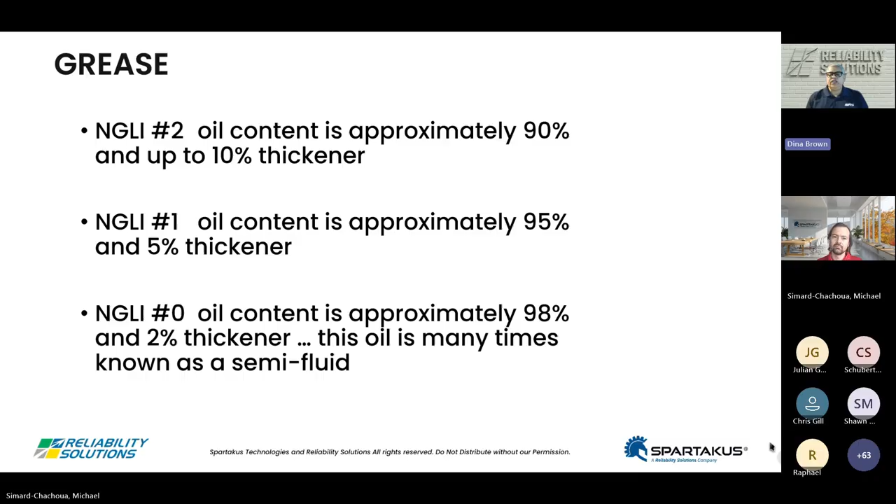And of course we talk about relubrication, and that's dependent upon a lot of conditions. Like Michael was saying, people have gotten very successful with ultrasound, but it depends on the grease you're using. Many times it's the operating conditions and temperatures—some people lube because they're exposed to a lot of contaminants and so forth. Bearing size, bearing speeds, bearing style, it's a given.

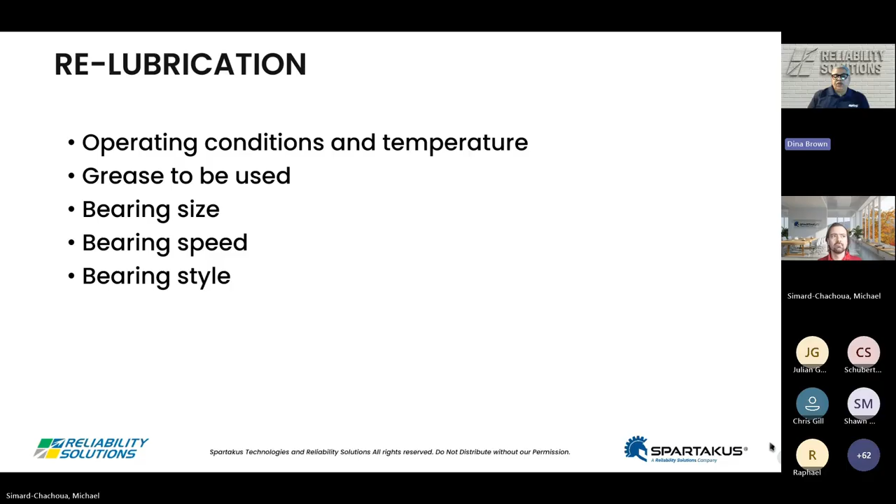And of course, relubrication intervals—there are some simple formulas according to your bearing, I think it's on the next slide, that can tell you how much should go into that bearing. But a lot of times it comes up to quite a bit, and you don't want to put it in there all at one time. So you have to decide, according to your conditions around that machine, how often you're going to go to it. You'd use a chart like this, using things like speed and the bore size of the bearing.

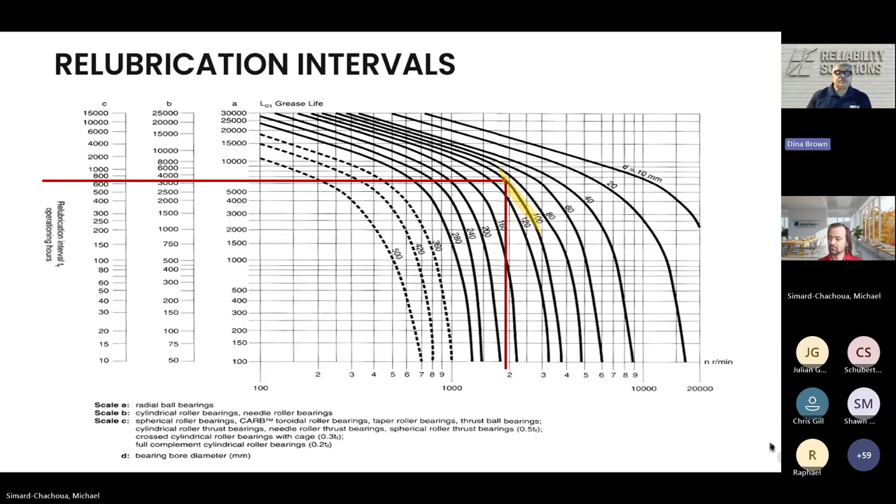If you look at those three columns to your left, there's an A column, B column, and a C column, and there are different types of bearings: radial ball bearings, cylindrical roller bearings, spherical bearings, CARB bearings, and so forth. In this example, with a 100 millimeter bore bearing running at about 1800 RPM, you'll see radial ball bearings need that calculated amount of grease about every 6 to 7,000 hours or so. The thing is, there's only 8,760 hours in a year—would you wait that long to put that much in there? And you wouldn't put that much in at one time, so you have to divvy it up.

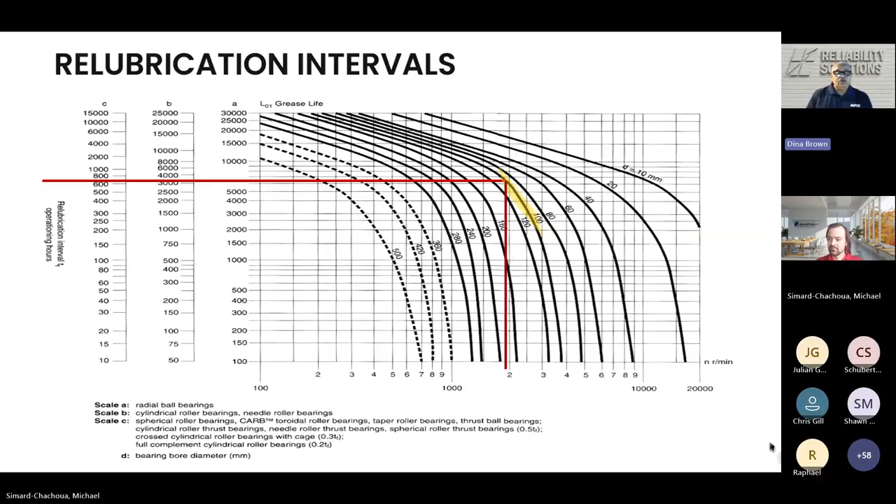So you would divvy it up if that's a bearing you're going to lube every 2 weeks or once a month or whatever. But what I really want you to notice is when you change your bearing styles, it really changes things. That B is cylindrical roller bearings, it cuts it in about half, so you go to those much more often. That C column, talking about spherical bearings, wow, it's down to a little over 600-700 or so. So it depends on your bearing.

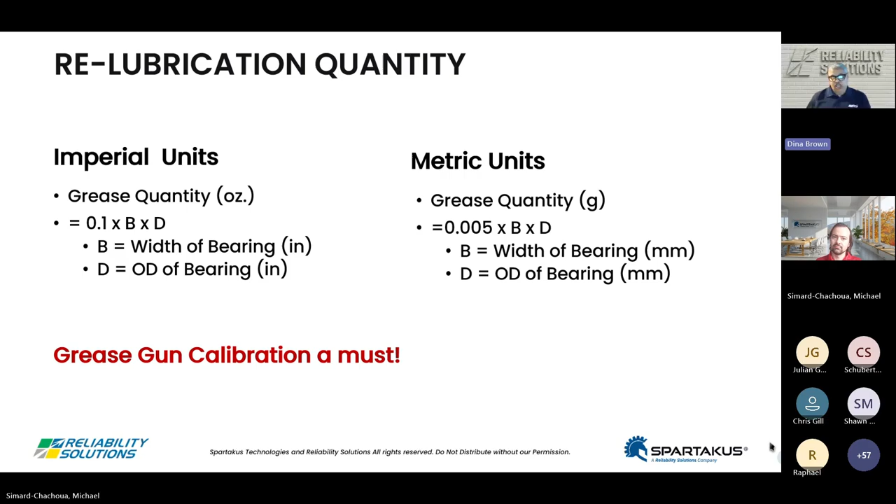And of course, this is just the relubrication quantity, you're calculating what that bearing needs. Make sure that you know your grease gun, especially if you're not using UE or have a meter or something. It says grease gun calibration - you're not actually calibrating your gun, but you want to know what the output is, because there's different types of guns out there. And if you don't have a meter, you need to check that gun to see what each pump or whatever is worth.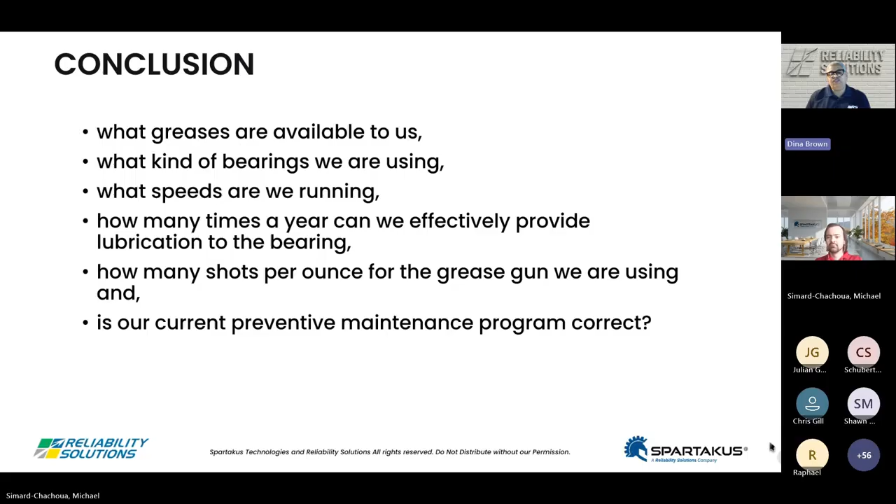And of course, the conclusion of that is we have to know what greases are available to us, what kind of bearings we're using, and of course speed is a consideration. How many times can we effectively lube that bearing in a year or whatever? How many shots per ounce to the grease gun we're using, or if you're doing it in grams, calculate it that way. And of course, always question ourselves and see if our process is correct.

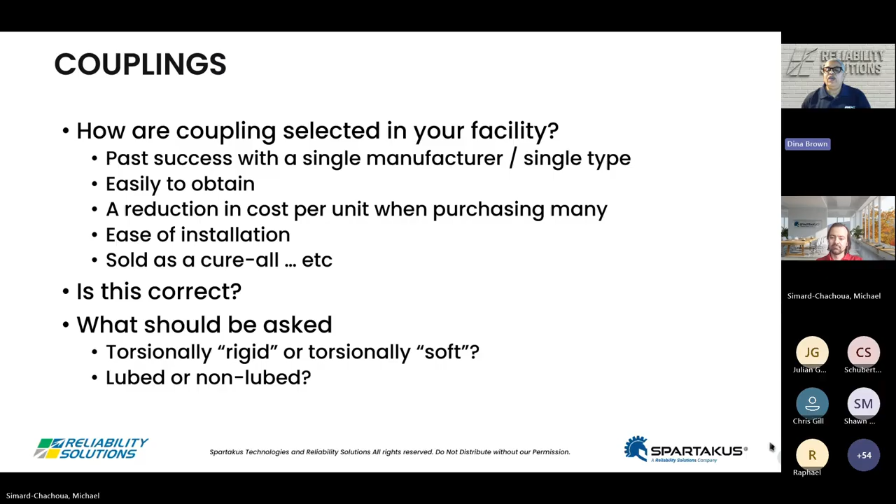Keep in mind that yes, their coupling can, but what are you going to be changing out? Bearings or motors or pumps or gearboxes, because it's going to put those forces right back down the line of that shaft, and everything else on that shaft is going to destroy itself from those forces and that misalignment, taking clearance out of bearings and so forth. But we'll be changing out those bearings or motors or whatever, and we'll put that coupling right back in there because the coupling's so great. That's not how we should be doing business.

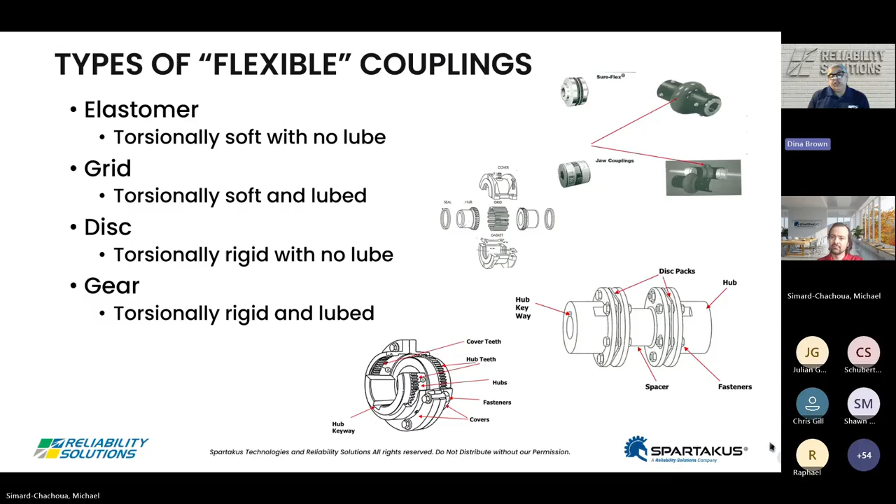And of course, you should always ask whether you want it torsionally rigid or torsionally soft. This is just a few examples - you get torsionally soft with lube, or torsionally soft without lube. And then, of course, you have your rigid style couplings the same way - you can get them lubed and non-lubed as well. But you have to match the coupling to your machine set, not just what we like, or ease of installation, or sold as a cure-all, like we mentioned.

Always make sure we use the proper coupling gaps as specified by the manufacturer. Check end play, and so forth on your equipment to make sure that won't affect anything. If it's one of those big old motors that has plain journal bearings in it, make sure you find the magnetic center before you set it, because it will find its center and it'll jam you up and thrust against those bearings, or it'll try to pull back on you and it'll end up costing you life on your machine.

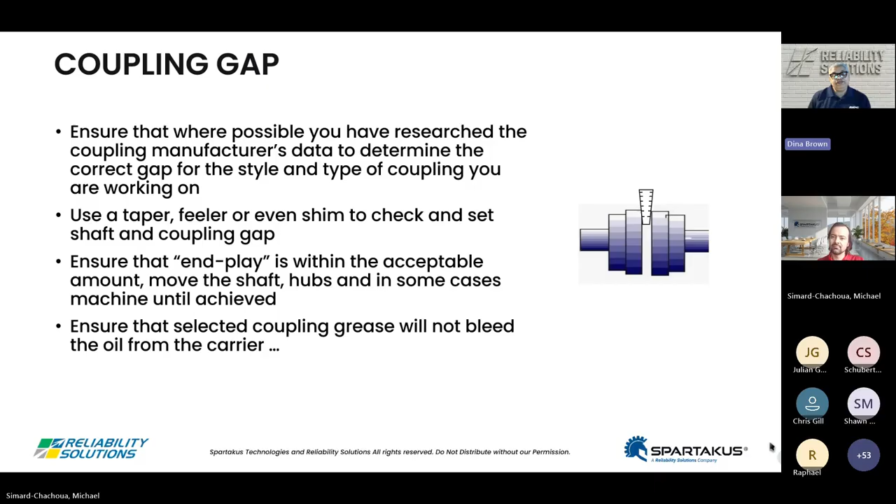Summation, we have only scraped the surface, and I'll let Michael speak. Yeah, so that brings it to the end of the presentation. Thank you, I know we went a little over, and I'm taking some extra minutes of your promised 1 hour. There was a lot of content to look at. I just want to remind everybody here.

So what we did today is give you an overview of precision maintenance. We didn't go into the process of each of them, how to correct them, how to assess them, how to train, how to assess if you're trained or not trained. So there's a lot of different pillars in precision maintenance, and those are also just the ones that we presented today. So if you're interested in this and you want to learn more, you think you might need coaching, maybe you want to have a process in place, maybe you want to have your technicians participate in some dedicated and certified courses. So we give all these things.